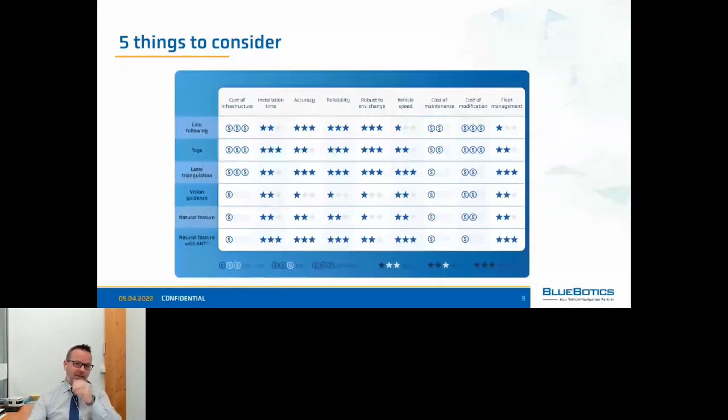One is the cost of commissioning and installing a system. On the other side is the cost of maintaining, and maybe updating and modifying, the system. In between, we have everything related to the performance of the system: accuracy, reliability, and the speed the vehicle can achieve.

Depending on the type of vehicle and type of application you have, you may want more flexibility or more reliability. We are in a lucky situation to propose a product that can do most of this in a quite ideal way, but again, that's not the goal today. This was just to give some overview.

In terms of which technology you should choose, it's more important to understand that for an automated vehicle there is a commissioning step, which is not something you have with manual forklifts. With a manual forklift, a customer comes, you show the vehicle, they say yes, and then you send it, and that's it.

If you sell automatic guided vehicles, the key point is the integrator. It's the one that will go to the customer site doing the commissioning. At that moment, the cost of infrastructure, the installation time, and the commissioning procedure are fundamental on one side. On the other side, it's important to have the quality of the product and the quality of the navigation, so that the automatic vehicle operates perfectly and does not require human intervention.

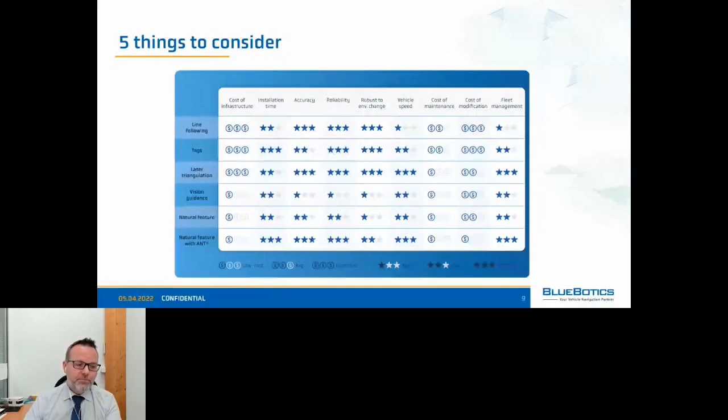Third point: if you decide to move from manual forklifts or manual vehicles to automated vehicles, the question is, does your staff have the skills to do this job? As I said before, producing and selling manual vehicles is not the same as producing, selling, and commissioning automated vehicles. So it's very important to find out if the team dealing with automated forklifts or vehicles has the right skills, education, and experience to deal with this new kind of product.

Point number four: we should not forget about the battery and charging approach used in a vehicle, because it has a very important impact. Especially in the last year, as we moved from lead batteries to lithium batteries, the ratio between a vehicle's operation time compared to time spent charging has dramatically changed.

By choosing the right battery system, and the right charging system—which you can discuss with all our partner companies in the group—you can have a huge impact on performance. You can move from a vehicle working 50% of the time and charging 50% of the time, to certain vehicles that can work 90% of the time and charge only 10%, again depending on the battery and charging technology.

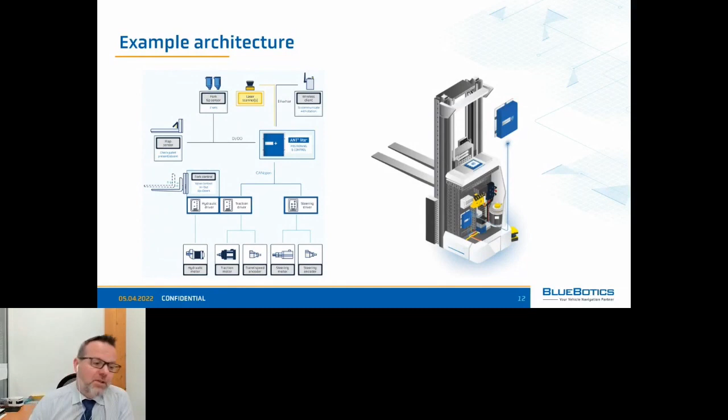This was the part about how to automate. We also raised three questions that are common for someone doing automated guided vehicles, or let's say, automated forklifts or autonomous mobile robots. Point number one, a question that comes very often is: what do I need if I have more than one vehicle which is automated?

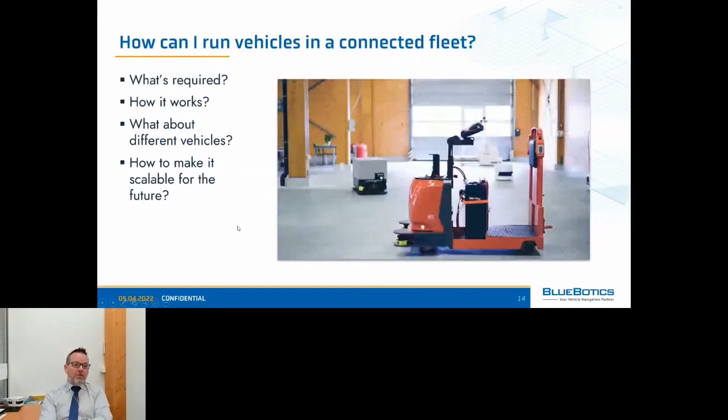In this case, we talk about a fleet management system. So basically, what is required for that? I may just run the video here.

What is required? First of all, if you have more than one vehicle, the vehicles are sharing the different streets or ways. So one needs to have a traffic management system that allows knowing which vehicle can go and which vehicle has to stop when there is traffic in a certain place. A second point, which is fundamental, is that if there is a fleet of vehicles, one should define which vehicle should do which task. This we call scheduling.

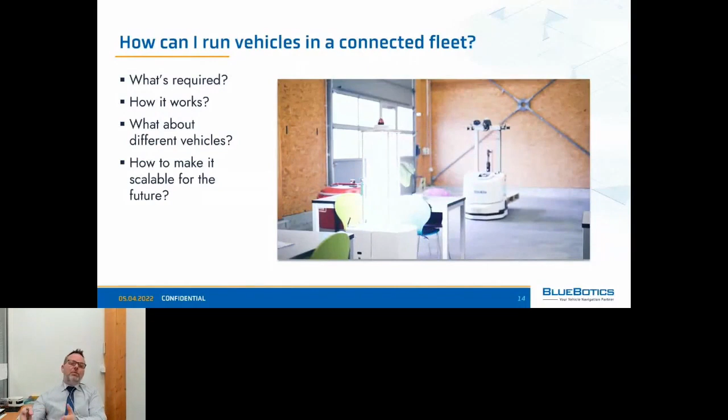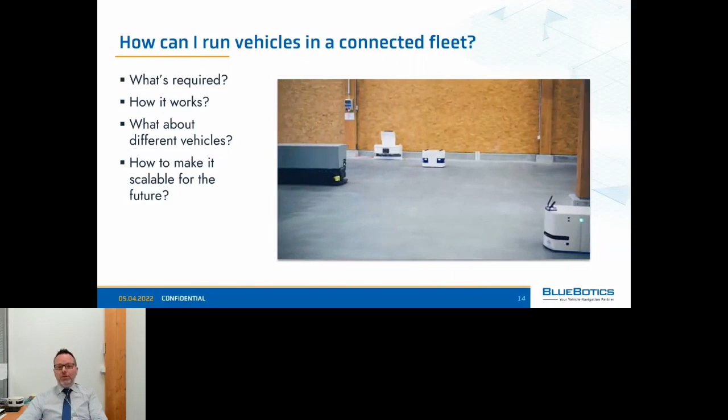These are the two most important functionalities in a fleet management system. I just repeat: on one side is scheduling, which means deciding which job has to be given to which vehicle and when. And the second one is to coordinate all these vehicles moving around by having a traffic management system.

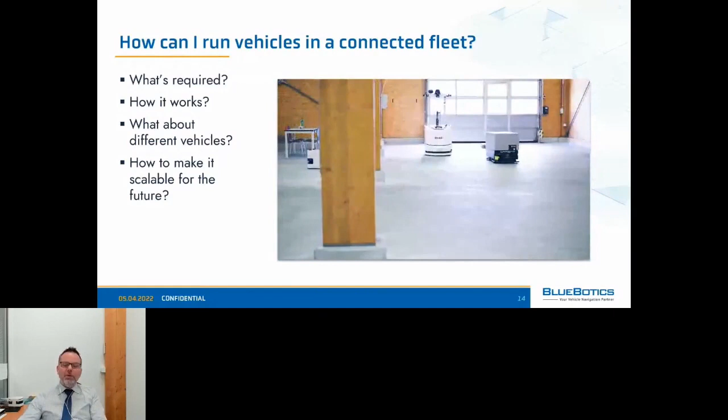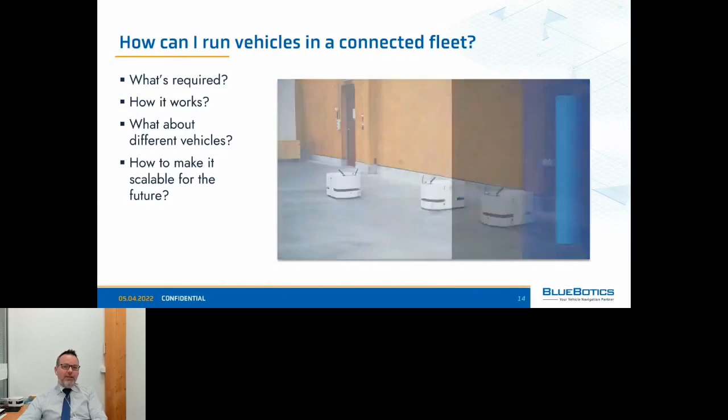How does it work? The idea is rather simple: to have a centralized system that is regularly talking with all these vehicles and knows what the vehicles plan to do, where they plan to go. With this in mind, the system can then coordinate the different jobs that have to be done and the different routes that the vehicles are traveling.

There is also an emerging question. There are more and more end customers who say that most of the time they need more than one vehicle, and they need different vehicle types. They may need vehicles to move pallets, but also vehicles to move boxes or cars, etc. So there is a need coming up for having different vehicle types, or even different vehicle brands, working together. That's indeed a key requirement from the market.

There are very few suppliers that can solve this problem; it's rather difficult to have this. There are installations, for example at Volkswagen, where you have three different vehicle types and three different streets, because every vehicle needs its own path since they are not able, with their different fleet management systems, to share the same space. And of course, this is not ideal in terms of cost per square meter and cost of the fleet management itself, because you have to install three different systems.

That's where we think we can make a difference in the future, because with our system, we can make different types of vehicles and different brands work together.

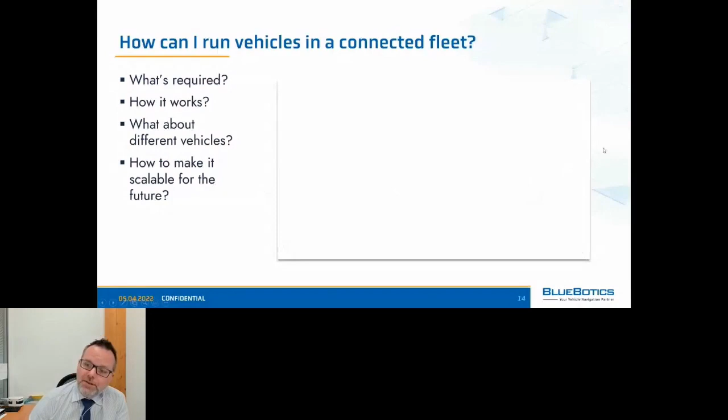A second point that, to be honest, we also underestimated at BlueBotics in the beginning, about 10 years ago, is that the vehicles, in order to do their job, have to have interfaces. On one side, they need an interface to the supervision team, who have to know how the system is performing, if there is maintenance to do, etc. That's relatively clear. But the other point is that it's important to have an interface to the business software.

But I would say that the most typical installations are really installations where the whole system is integrated to the business software. Basically, an automated vehicle is a kind of arm of the business software that can not only track what's going on, but really start moving things around, like moving pallets, moving goods, semi-assemblies, etc. That's one part of the story, which is very important.

In our case, we have a very clear and simple API, application programming interface, which is standardized and allows building up this link between the fleet management that we call ANT server and the business software in a rather simple way. The second point that is very important is that it is quite seldom that a vehicle can work by itself without interacting with anything else in the physical world.

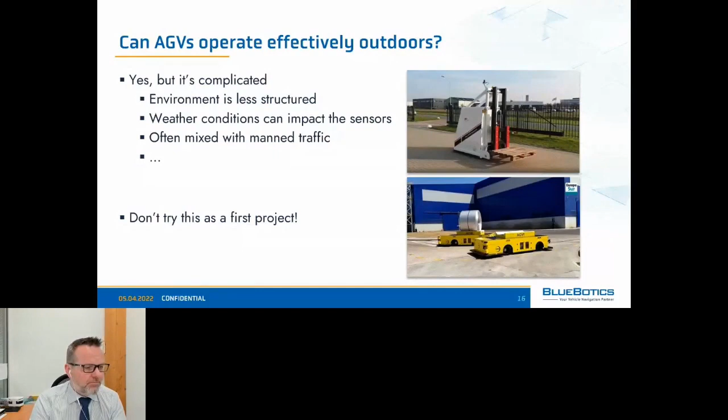Here, I may have a question for Lloyd, because this would be all the part about the technology, why to automate, etc., and now we have examples of customer projects. So should we open the session for questions at this stage, and then go to the examples and open it again later on? Sure, I mean, it's your choice. That can work. No, you are the boss. Okay.

We don't have any questions yet coming up in the chat. So maybe we go through the projects, and then we can pause in a few minutes. Sure, let's do that then. And then your job, audience, is to invent questions later for the end of the presentation.

Okay, so the idea here is that we would like to share a few projects that we think are relevant with you, to give you a better idea of what is an application with automated guided vehicles, automated forklifts, etc. So we start with project number one, which is an automation of production of parts for automotive.

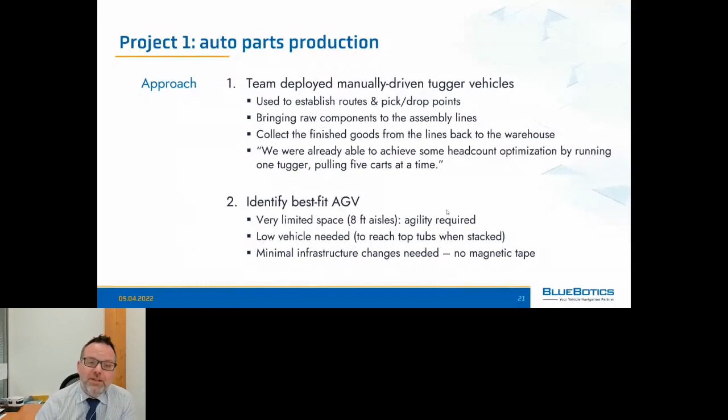These 3 different constraints are the main reason for them to choose the F3 Design Nipper vehicle, which is a very compact vehicle. It can move up to 1 ton. And another fundamental point is a vehicle that can turn on the spot, so it's a differential drive system. It has basically 2 motors, and they can really turn on the spot to take as little space as possible.

The statement of the CEO of the company was that as soon as they saw this vehicle, they said, 'Oh, that's clear, that's what we need for this application.'

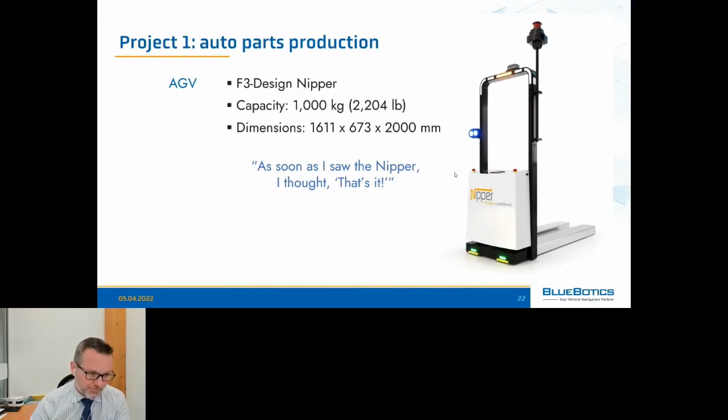In terms of software, as I said before, the BlueBotics ANT server was interfaced with the Ignition SCADA software. They also developed custom-specific interfaces to monitor the operation of the vehicles.

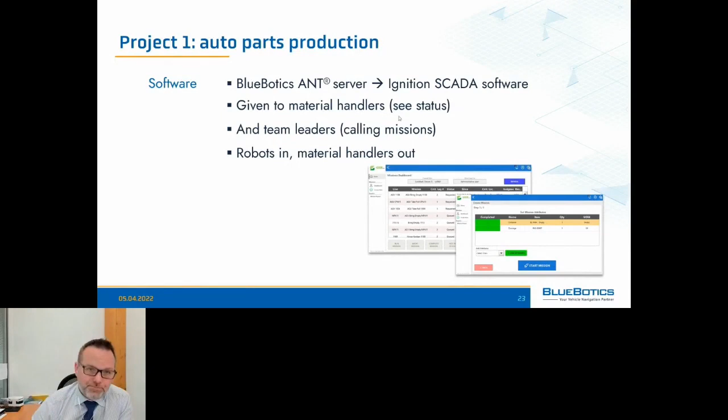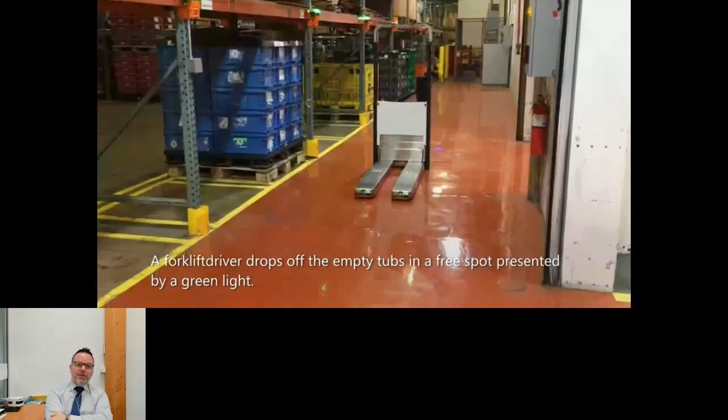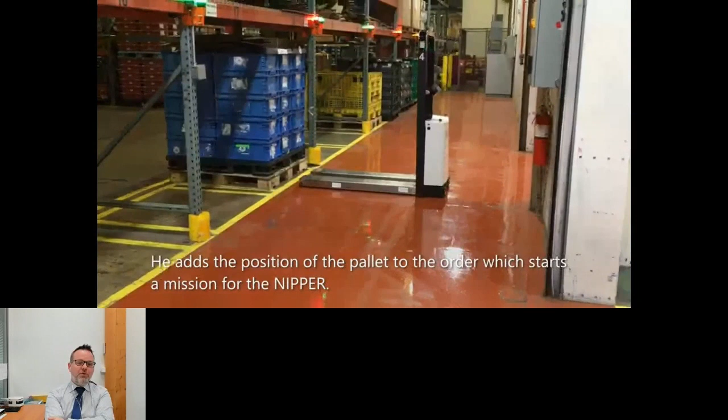Here you can see a video showing a typical movement. You can see this vehicle that can, as I said before, turn on the spot. This is not the smallest hallway they have, they have some that are even smaller, but you see that there is not so much room for larger vehicles. If you had to do more complex maneuvers compared to what they were doing here, it would be difficult to pick up the pallet.

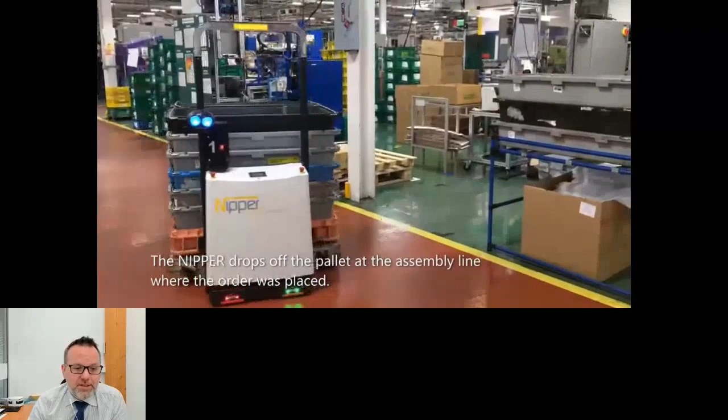As you can see in the background, there is a lot of stuff everywhere, it's a big job for them to move all this. Not everything was completely automated, so they decided to automate first the processes that needed more movements. Here you can see the vehicle bringing empty boxes to the assembly line, again moving on the spot, which was fundamental because of the very limited space.

So in the end, they had 5 vehicles doing the job. They had more than 150 positions where they had either to pick up or deliver pallets, and more than 65 assembly lines were automated with this solution. The result is that they could reduce the resources needed to move all this by about 73%, which resulted in a break-even after 2 years.

And now they are evaluating adding also reach-truck vehicles or another type of vehicle to automate all the processes, which again shows the importance of the point referred to before: the system must be scalable, because you start with one process and then you want to automate the next one. And the other point is that you need to be able to use today one vehicle, and maybe tomorrow another model or even another brand, in order to make everything work well and automate all the processes you want to automate.

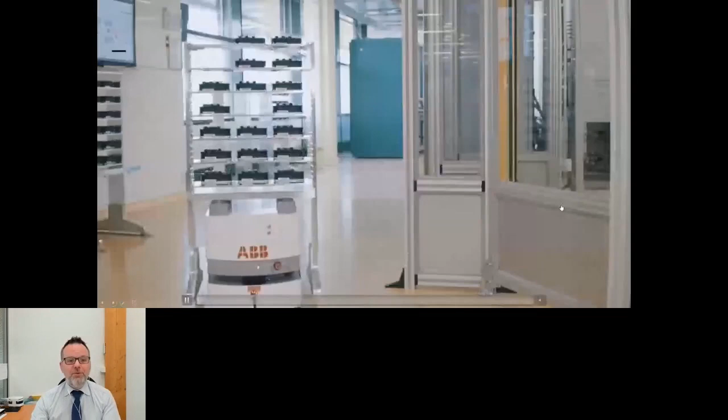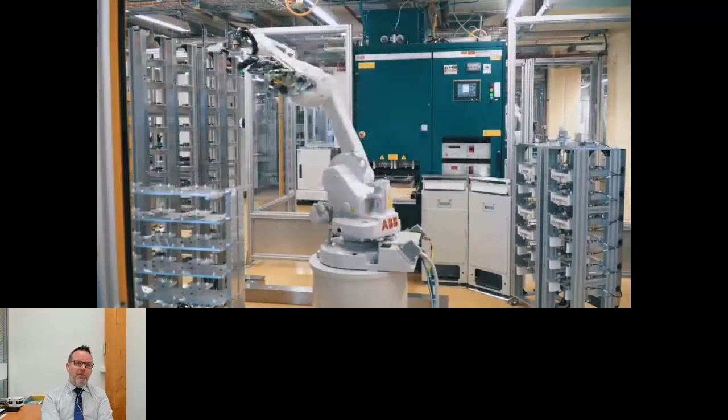So that's a cart full of semiconductors being moved from production to the testing facility, and that's a fully automated testing system taking every single semiconductor and testing it fully.

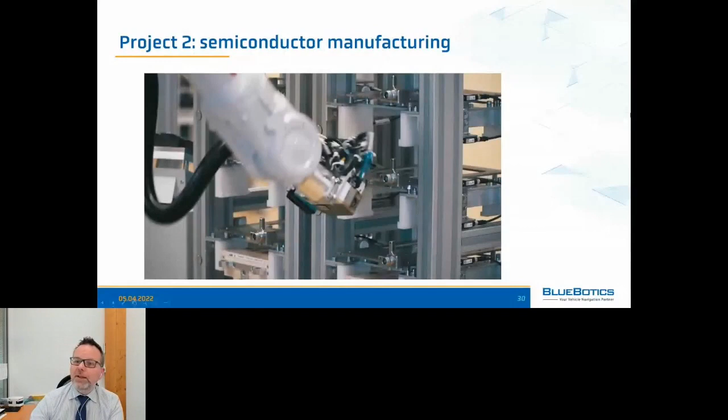The whole project is quite impressive. Their goal was - the plant in Lenzburg had, I don't know exactly, but probably about 300 employees there, with about 100 employees working in the clean room.

That was also a key constraint - a clean room, ISO 5 standard - and the goal was to dramatically reduce the people in the clean room. The job there is complicated because you have to dress up for it, the space is limited, and it's very expensive. So there was a significant increase in productivity where basically they planned to move from 100 people in the clean room to only 2 to 5 people remaining there.

This is, of course, a reduction of jobs on one side, but the alternative was to lose all 300 positions. So the other 200 working around the plant will stay in Switzerland, with a fully automated production plant making the difference and allowing ABB, or let's say Hitachi, to keep this production in our country.

Quality was also improved by having everything automated, because you can better handle the quality and quality control. This project won several awards, including Factory of the Year, for the implementation of this automation system.

The last example we want to share is a completely different field. It's still automotive-related, compared to the first one, but it's not producing components for cars - it's about producing tires. The company is Michelin, and the plant is in Cuneo, Italy, a very good place for wine and food. The industry there is tire production.

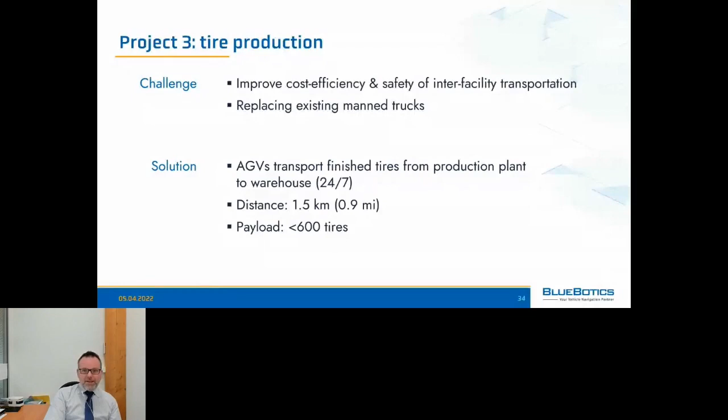Very quickly - sorry for those that don't speak Italian, but the comment shown is in Italian. I can, of course, translate that.

There are several tens of thousands of tires produced there every day, and they are moved from production to warehousing, which is this building here. Here you see one of these big vehicles picking up the system. This transfer is completely automated.

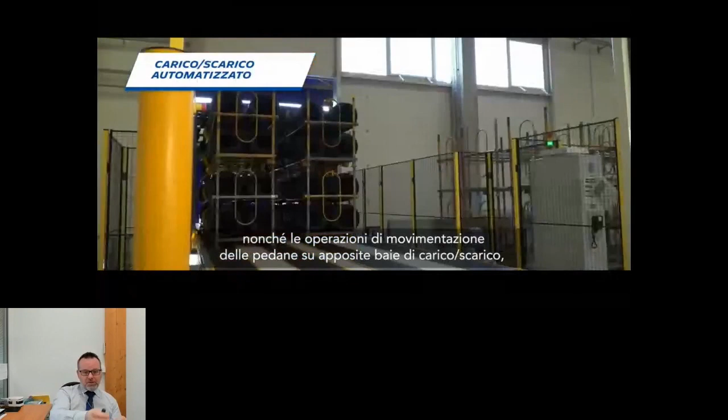On the other side, the transfer of the tires is completely automated. It moves 1.5 kilometers to the other side of the plant to deliver this to the warehousing and preparation system for delivery via trucks. All of this was developed to be fully safe outdoors, with sensors designed for this purpose.

This was a huge improvement in efficiency, and also a very important cost reduction. It improved safety, because all the automated processes guarantee safety. From an ecological point of view it was extremely interesting too, representing a reduction of 50 tons of CO2 per year. That was the presentation of BlueBotics.

Now both Julien and I are available for all your questions, and we are ready for you.

Maybe just to get started with a couple of questions. You and Julien were at the Modex show in Atlanta recently, just last week, right? How was that experience? Do you have any key industry takeaways?